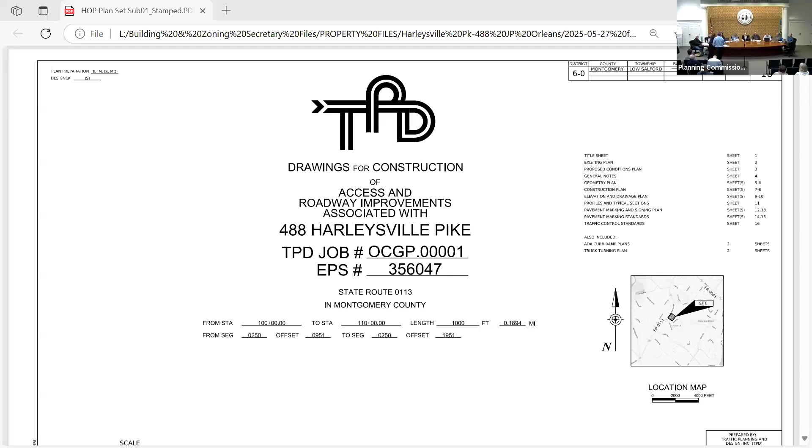So what you're seeing on the screen is the highway occupancy permit plans that were submitted to PennDOT about 3 weeks ago, with the review letters due at the end of next week. Showing the site plan there with the roadway improvements. I know it's a little hard to see them there, but primarily what you're seeing is the access directly opposite Meeting House Road on Harleysville Pike. An emergency access immediately to the north, at the northern end of the property limits.

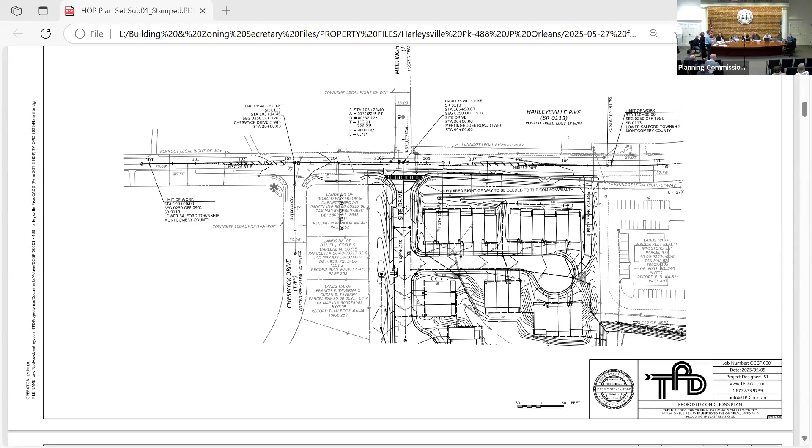And within the roadway cartway, we're improving the roadway by installing a center left turn lane between Cheswick Drive and Meeting House Road, as well as a dedicated left turn lane for the site access. But the additional improvements are ADA ramps and crosswalk at the new site drive, as well as a 6-foot wide shoulder along the site frontage. This has all been coordinated, as Kristen said, with PennDOT by means of conceptual plan submissions and collaboration on that.

PennDOT had indicated that they are accepting all those improvements that I just listed for you in order for us to move forward with that HOP application. And like I said, this plan is under review right now, and we expect that review to come next week. So we don't have that yet. Correct, they're due Friday. But we do have a response from PennDOT's consultant saying the department has reviewed the proposed concept and core boring findings provided and concurs with the proposed use of the existing cartway.

The department has also coordinated with the township regarding the potential signal along Route 113. And this signal is still in pre-planning phases, therefore it should not be included in any plan improvements for this application. Then it goes on about milling, paving, and overlaying. They want us to get rid of the existing striping and any bumps in the road or borings, as you would say. PennDOT also did say that our traffic study does not warrant the center turn lanes.

They said the existing traffic doesn't warrant them, and what we are adding with our 26 townhouses does not warrant these center turn lanes. But there was some pressure put on the department, and they are requiring us to do them. So we are doing what we can to deal with this existing situation and make lives better for the residents of Lower Salford. But it's extensive. The striping goes well beyond our property frontage. We have to move a very expensive utility pole. And maybe another having to do with that sidewalk extension along to Cheswick. We don't know. We don't have the review back for that, but my client's willing to do it. We do have some other issues to discuss, but wanted to start with this.

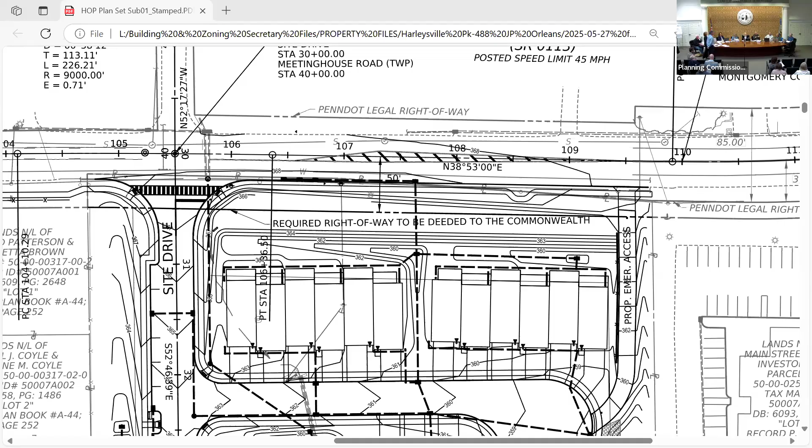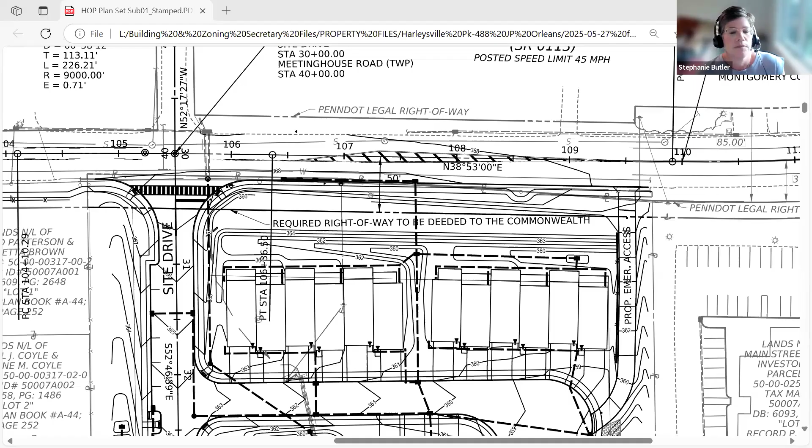May I ask a question about the curb returns? The curb returns, I believe, are set at 6-foot shoulders. Is the pole impacted if those were set back to 8 feet? Just at the access? I'm looking at the pole, it's right there on the edge. So that one's being moved already. There's a pole immediately to the north, screen right. That is already being moved with the 6-foot. There's an additional pole further north that would be likely impacted. Okay, so that's the pole in question if you were to shift another 2 feet. Correct.

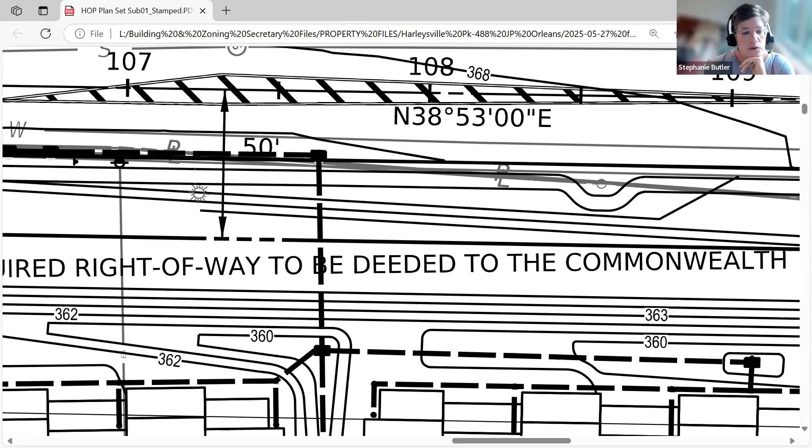So can the returns at least be set back to the 8-foot width? Because that would make them more consistent with the curb line that's at Cheswick, and it doesn't jut in the curb line for the northbound traffic. It's a question, I just wanted to ask it at this point, and I wanted to clarify if the pole was in the vicinity of the return. Are you talking about the returns for the driveway radii? Yes.

If you look from Cheswick to the site drive, you can see Cheswick's curb line is set back, and then it starts to taper in a few feet, so the curb lines are a little bit closer. It's not a solid curb line there by any means - it's a variable width shoulder that is proposed. Could your curb line be set back to 8 feet at that spot? I don't see any concern with that - that's a standard.

So basically, the way the driveway comes up with the throat of the driveway, there's radial curb lines that come out to meet the roadway. They're set back at those points 6 feet off of the travel lane, so obviously they would have to come in if you're going to widen along the front. She would ask that they just be moved 2 feet down on either side, with a small taper going back into 6 feet. So it'd be 8 feet at that point to allow for a future improvement and not have to rip up the driveway and start over. That's PennDOT, typically that's a minor sounding issue.

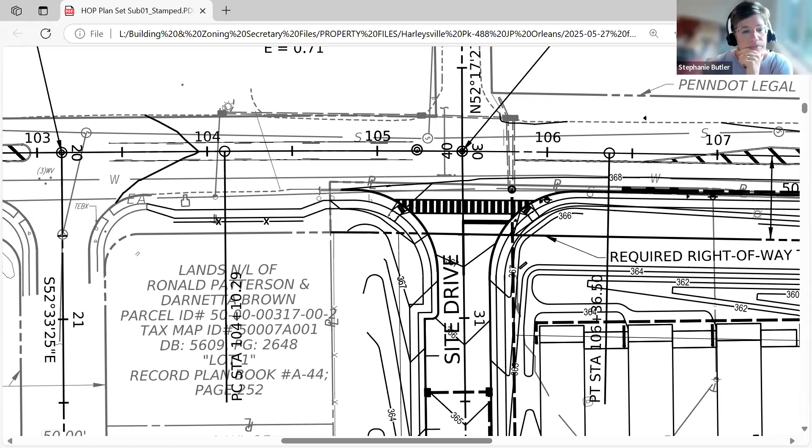I have one question for clarity. Traveling south on 113, there's going to be a left turn lane into the neighborhood. Traveling north on 113, there'll be a left turn lane on the meeting house. Correct, and you're not touching the Cheswick intersection or anything. There'll actually be a shared left center turn lane for Cheswick as well, southbound. 113 will be left turning into Cheswick. So that whole section's being expanded basically to 3 lanes.

I'm sorry if I'm breaking protocol - I don't know what the protocol is relative to asking questions and stuff. But after this, should I make a list of all my questions? Okay, thank you.

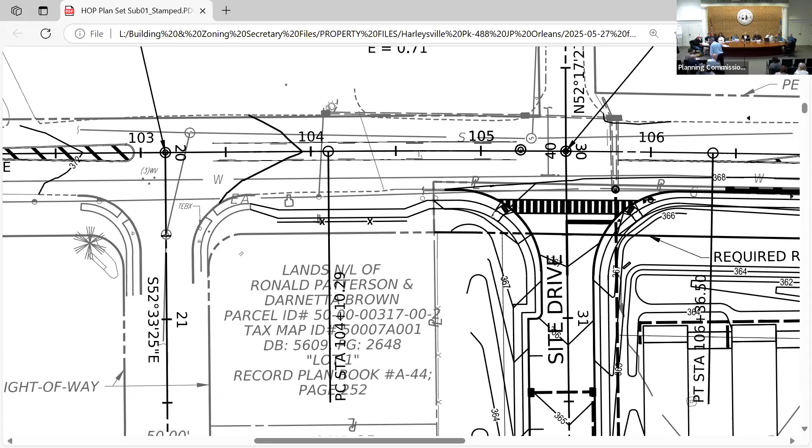The 3 waivers on the first page are the same as our last discussion. The first has to do with preliminary and final at the same time. The second has to do with intersection spacing - that's the distance of our proposed road to Cheswick. The third has to do with the clear sight triangle. I understand there's a code change to make that change, but we're okay with the 75-foot triangle there.

Turning to the second page, items 4, 5, and 6 are all the same - we'll stop at 7. The grading slopes have to do with the stormwater basin, that's to maximize the capacity of the basin. The second one has to do with the shared path location. We have a 25-foot easement, and we've located the path so that it respects the boundary of our neighbors and stays out of those significant environmental features, so it's located along the edge.

Replacement trees - this has been amended. We have a greater number of replacement trees than you saw the last time we were here. So the waiver request is that we plant 80 trees out of that 666. We do have 196 other trees, but they're in the category of street trees, stormwater management plantings, buffer trees, and site element screening. They don't count towards the replacement trees, so there's a waiver request for that.

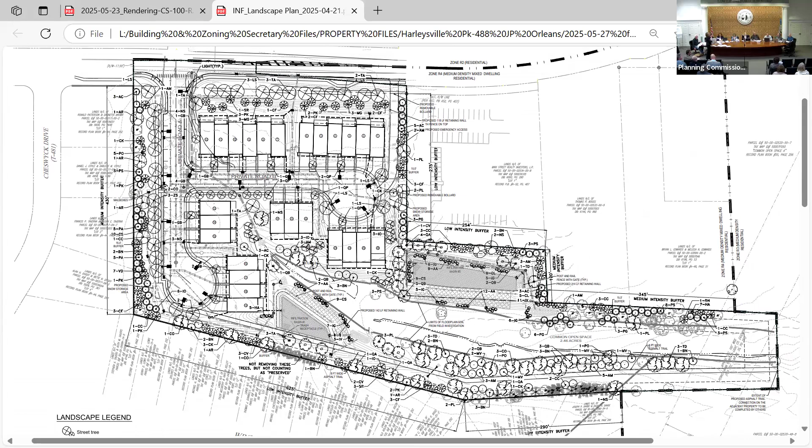You want me to be specific? No, I'm okay, I just want to find it before, thank you.

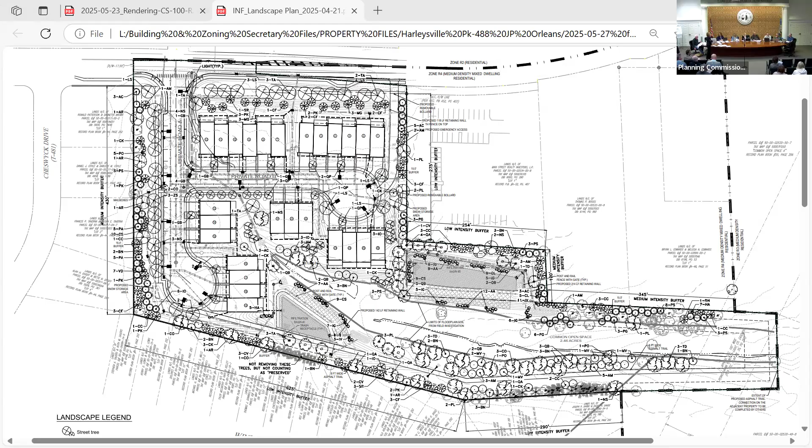And of course, I know there's going to be a lot of questions about this too, especially since you mentioned ripping out the pine trees along 113. I want to make sure other folks saw that the color one actually shows you might do a little better with the buffering along 113 that's going to be restored after you rip out the other pines.

Right, and then I think if we go to the left, there's a berm near the backyards of the Cheswyck neighborhood. You can see there that the planted trees, that is a berm, correct? A raised berm. I don't think they have the berms in. Is that... okay, just want to make sure that's clear for everybody.

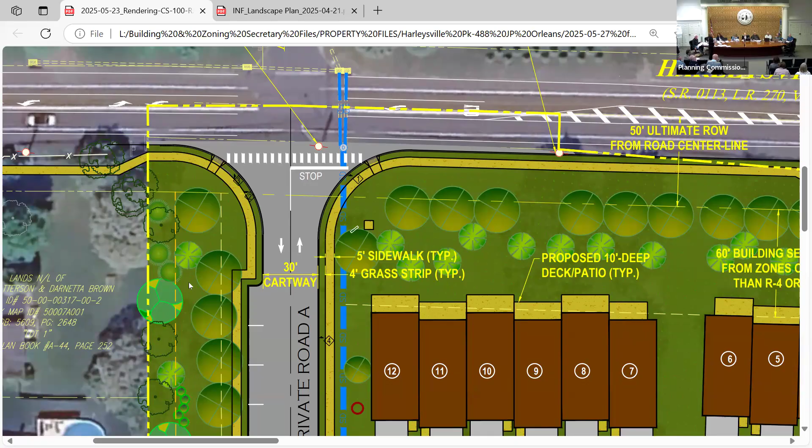And that's a mix of evergreens, which is... yes, that should carry along both property lines. Okay, yeah, there was conversation about the fence.

There's a hodgepodge, we walked it. I didn't walk it, my clients walked it. It's different as you go, some is split rail, some is like box with mesh, some is down, some is up.

We tried to discover it through plans, old plans, how that fence came to be. We can't nail who owns the fence. It is right on the property line, so we don't have intentions to touch the fence. We're just going to landscape all the way in that area.

Remember one of our earlier designs had the backs of these units facing the neighboring properties, and that was a no-go. So we've turned the houses so that none of the backyards on this plan face any of the adjacent neighbors. Instead, they get the landscape.

Stephanie, do you have something else?

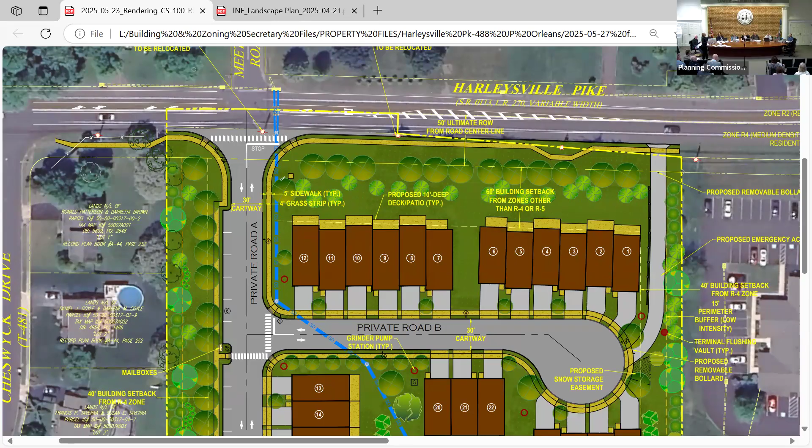Yes, I did. I just wanted to suggest, Mike, possibly bring up the HOP plan that shows the pavement markings. It will be a little cleaner, a little easier for people to see what's being proposed. The previous plan was the land development plan, so it was missing some of the line striping.

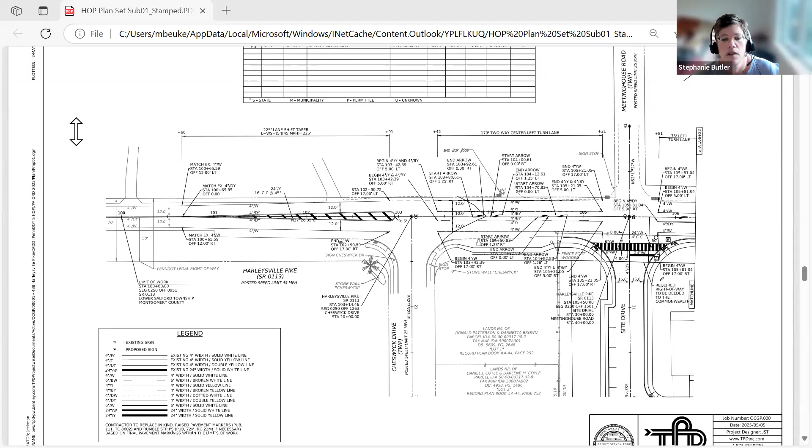So Mike, if you maybe zoom in at the intersection, going from left to right from this sheet to the next sheet, you can see where they have their center left turn lane, you have the 4-inch white edge line on both the site side and the far side. The existing dash line is the existing edge of pavement today.

In both cases, moving to the right, you'll see the left turn lane, the designated left turn lane that goes into the proposed site drive. Their proposed curb returns and shoulders, and then the 4-inch white line on the opposite side approaching the Meetinghouse intersection.

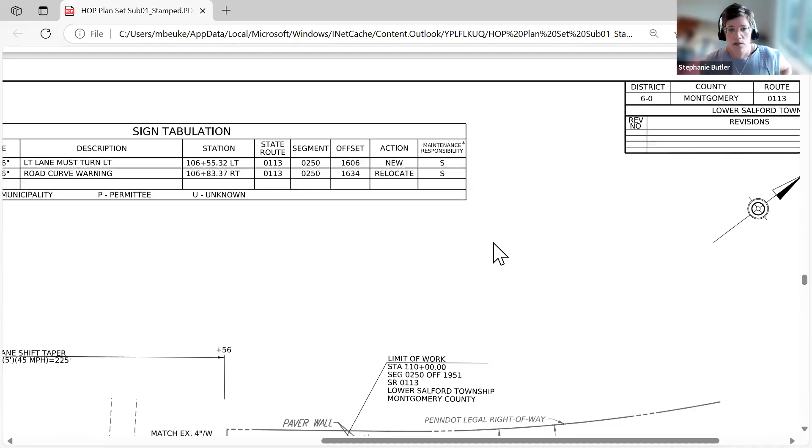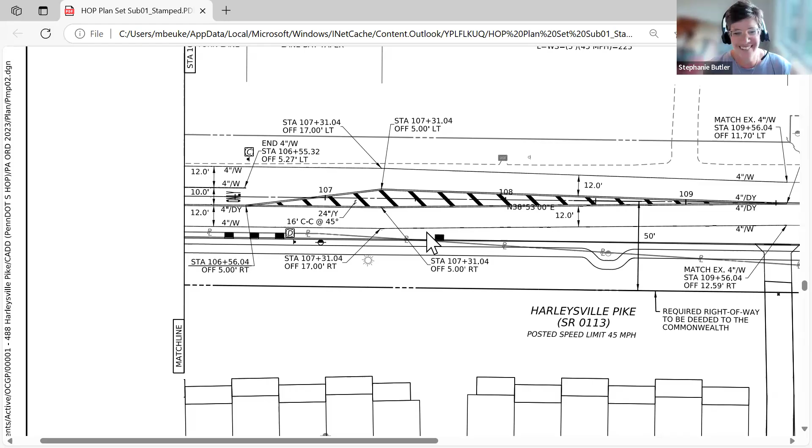So this was the subsequent HOP set that came to the township for review, and we reviewed it in conjunction with the land development plans. Our letter addresses comments for both of the plan sets, and this is the plan that's currently into PennDOT for review. I just felt like it was a little cleaner version of what the proposed roadway condition would look like out there along this section of 113.

All right, thanks, Stephanie.

Anyone else need these? Bring those people to comment, if that's all right. Okay, we're going to open up the floor for public comment. Please direct the comments to the board and not to the consultants. Also please state your name and your address, and please speak.

Who wants to go first? Alan Duddy, 483 Cheswyck Drive. A couple of things real quick.

The situation with the fence that just came up, I thought that was already resolved in previous meetings, that we were in fact going to have fencing replaced. The fencing did belong to the Durstein property because he had horses on the property, so it was with that particular property. I think we still need to revisit fencing, especially given that some of the fencing is falling down, it hasn't been maintained since the new owners have been in there. We've been maintaining it, the property owners.

So that was one thing. I don't know where to begin with this 113 left turn lanes. It just looks like a cluster, it's the only way I can describe it. You're having cars heading north, cars heading south, both going into left turn lanes, some trying to get into the new drive, some trying to get into Cheswyck, some trying to turn on Meetinghouse.

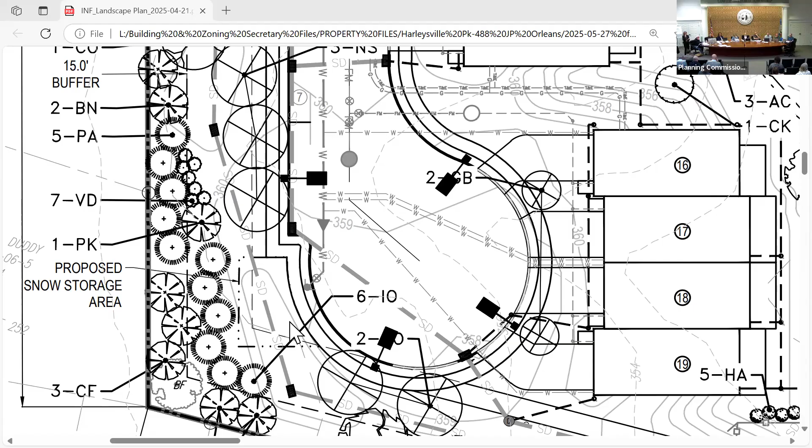So maybe to tag on to what he just said, Robert Menges, 509 Oakland Avenue, so down Meeting House Road. Similar concerns relative to the turning lanes and the amount of total frontage that's gonna be there. Like you said, it's a mess now. As a cyclist, often heading towards Meeting House coming from Cheswyck, from our wonderful bike path that we have here in the township, I'm taking my life in my own hands.

And if you're now adding turning lanes into that, and you're gonna have trucks that are gonna need to navigate, and I wasn't sure if I understood that we're adding 6 feet of bike lane on the side, or reducing it, but I think you really need to take a hard look at that entire intersection coming from Cheswyck all the way down, hundreds of feet past Meeting House, to make sure that you've got enough thoroughfare and an emergency side road, if you will, so people who need to get off on their shoulder can.

We want this to be friendly for the township and the existing community. We welcome more people coming in the community, but we need to make it safe at the same time. And from what I'm just seeing, and I'm not an engineer, it sounds like it's going to be a congested cluster of an issue. So I just ask, and I'll trust our board that you've got the right people on this, but it doesn't sound sufficient to me.

If I then go on to some other things, down all of Meeting House, and this may be more of an issue for our board members. You're probably aware that many of us have lost our well water supply over the years. I understand that shifts in the limestone, et cetera, can cause that. My concern is that when this development goes in, what does it do to the surrounding area bedrock, and possibly shifting of the water supply that goes through all of the people down Meeting House, down Oakland and Woodland Avenue, right? And I know that your company can't be held liable for that, but have sufficient studies been done to really ensure that 6 months from now, 6 years from now, I don't lose my water?

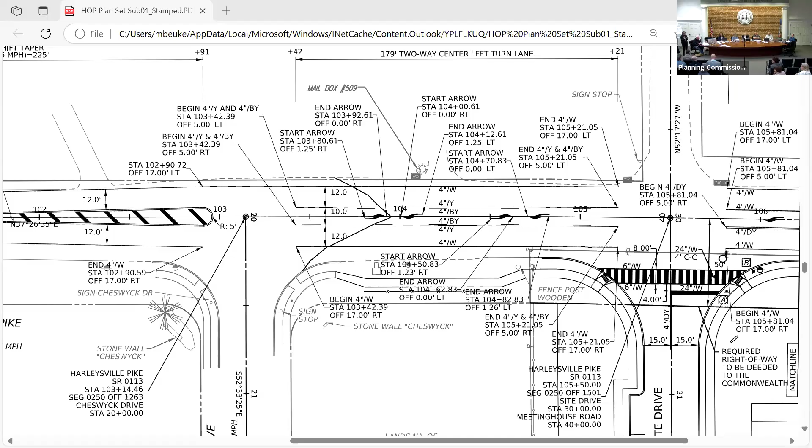Sure. My name is Joe Lee, 471 Wexford Circle. I have a question about the landscaping on what would be the southern edge of the property down below. There are 2 stands of very large, fully developed pine trees, and they're indicated as BF. What does BF mean? Buffer planting. Does that mean that stays or does that go? Stays. Second question is that fence line

across that back is all horse pasture, and it wasn't ours. And it's in desperate need of repair. Is this going to be referenced to the board? Beg pardon? Oh, I'm sorry. Are they gonna repair that fence line, because there are sections of it that are missing? I don't mind the animals coming through, but if you're putting a walking path in there, I have objections to other people using my backyard to cut through, to cut off a half a mile. So I'm just wondering if they're gonna do that.

And I have all the same objections to what they're doing. I won't go that way anymore, I just go out the back way. I wouldn't even think of using 113. Thank you.

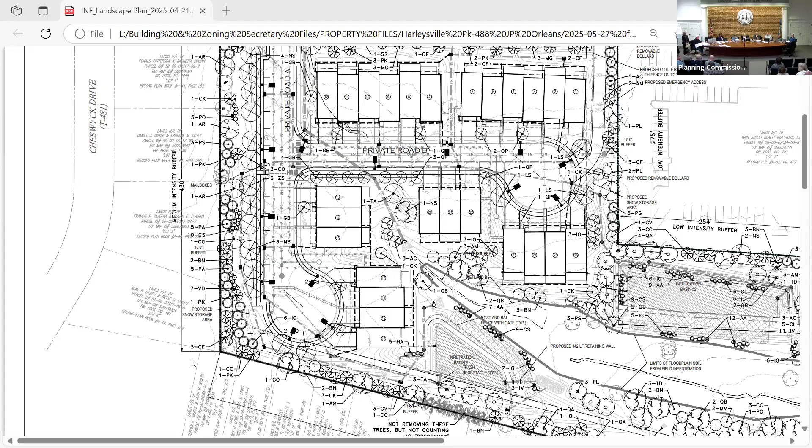And lastly, one last question. It appears, I think, that the 8-foot walking trail has been moved further back. Am I correct in that assumption? The walking trail that goes, yeah, right there, Mike, where you're pointing. That appears to be further back from the last drawing that we saw in September.

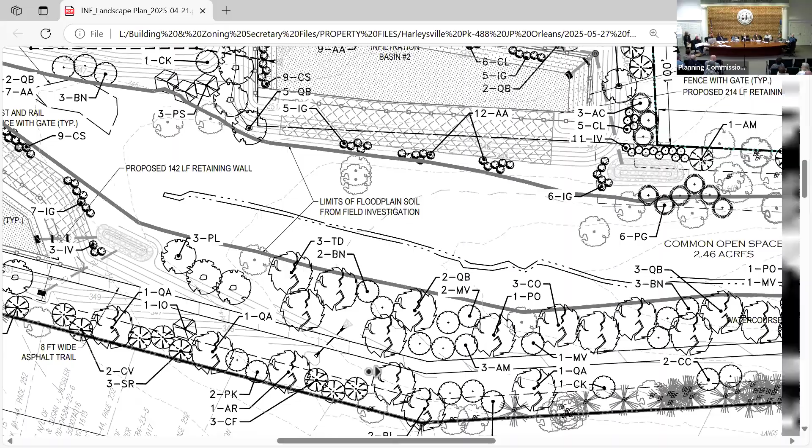Julie, can I... Betty, can you please make the final comments? I sure can. Because we need to discuss some of these items. I'd love to. Appreciate it. Thank you. What's your last name?

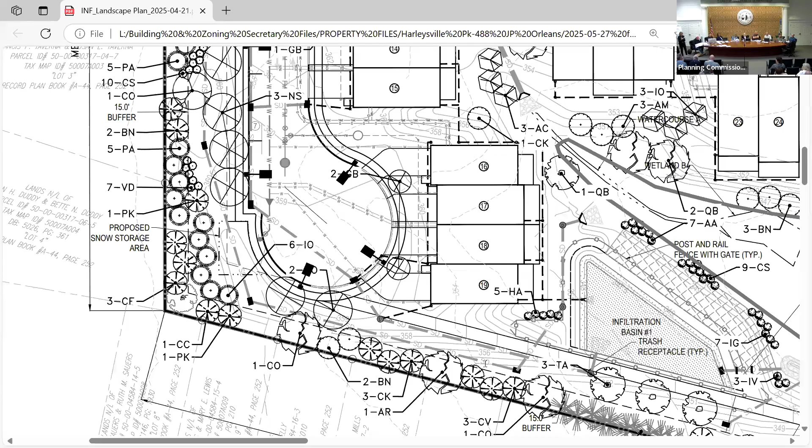Betty, 483 Cheswyck. It seems like we're doing a lot of reconfiguring and a lot of rearranging everyone's lives, the community with the road, safety, privacy, security, everything is being jeopardized for one development. And I've never seen any other development in this township go through so much to be able to get a development put in.

And I'm not putting any negativity on you. I'm just saying what we had to call for PennDOT, what we had to ask for from the community, what we had to ask for from the planning commission. How many revisions you guys had made is crazy. And I appreciate you accommodating us. Don't get me wrong. However, it's a lot just for one development.

The trees are way out of numbers. You have 666 and you're gonna go down to 80, or even 176 was too low. It's only because you don't have space because you're putting 26 units in, which everyone told you, including the planning commission, that's too many units.

I understand you moved them around, everything is great. However, you still have them plopped right in the middle of the wetland, right in the middle of everybody's line of sight in the community and the neighborhood that's been there for over 50 years. You don't need them, but I know that's not gonna change, but we need more trees.

My berms on my backyard, I am not looking at a 35-foot triplex or biplex, I'll tell you that right now. If you're moving the berms out, which I wasn't aware of until recently, I want at least 14-foot shade trees all along my back fence line. And I want a 6-foot privacy fence, because that's what I was promised.

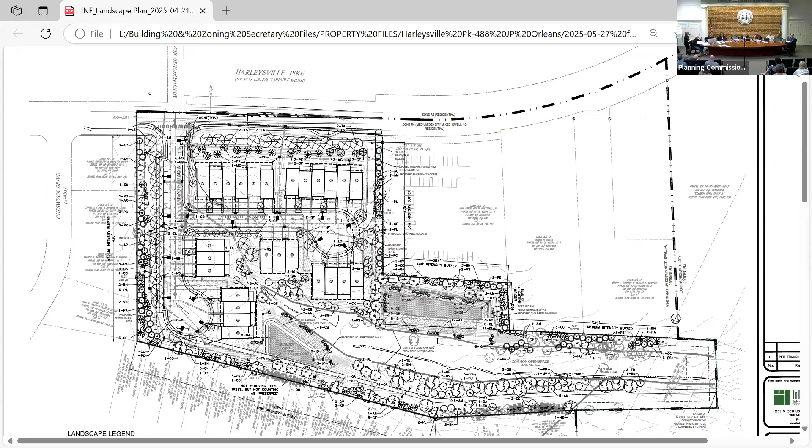And, continuing with that topic, Kristen, perhaps you could let us know, there is some concept of blasting. Yeah, we don't think that there's going to be any blasting. We didn't do the blasting survey yet, but based on the geotech that we performed on the property, we don't think it's necessary. Yeah, we have basements running, yeah.

Okay, I want to separate out the traffic and intersection issues, so the other issues we talked about get first. And we started talking about transport. Wait, I just wanted to ask you your thoughts, any further thoughts? My recollection was that was an open item, and I thought we're leaning towards in previous meetings that you're gonna take on the fence. I don't think that was ever 100% decided, but my recollection is we're sort of going that way because the residents are kind of between a rock and a hard place, they want everything. And the fence does need repair.

Here's the issue, and we didn't resolve it, and we had a staff meeting since our last preliminary time here in September, trying to figure out where the fence came from. Because it's right on the property line, it's hard to decipher who owns the fence, and it changes. So there's no great indicia. I know people who live there have an opinion, but there's a legal issue with replacing the fence that's right on the property line. I don't know who owns it. We would need easements from every property owner to do it. We're gonna have different opinions about the fence for different properties. Many people use it as their third side for their own fence in their property. How to manage all that seems untenable.

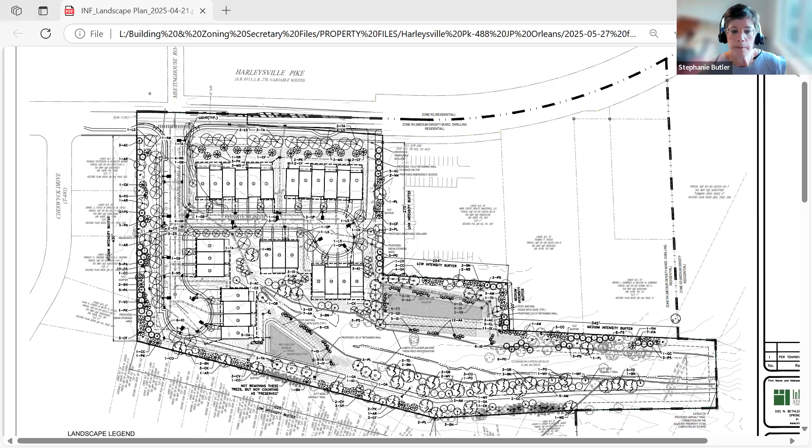There is a line of sight for the clear sight triangle, 75 feet back, 300 feet in each direction, left and right. And there is an existing tree or 2 that are within that sight triangle. It is on the adjacent property. Mr. Patterson and Miss Brown. Mike, if you wanted to bring up the land development plans, sheet 4. Looking to the left, you can see those existing trees and the dashed sight triangle line. So those trees are within that sight triangle. They are existing and they are on the adjacent property.

Likewise, there's a few other trees that are between the road and the sidewalk. I will point out the Cheswyck sign is to the left and back, so that is well out of the way of the sight triangle. I will also add that the required egress sight distance to the left and to the right is measured in a different way from a clear sight triangle, and we do not have any concerns with that. It says required sight distance, 45 miles an hour equals 383 feet. Available is 1,000 feet, and it's the dashed line. So that's measured much closer to the road, and there's no concern with that line of sight. But there is some existing vegetation within the clear sight triangle.

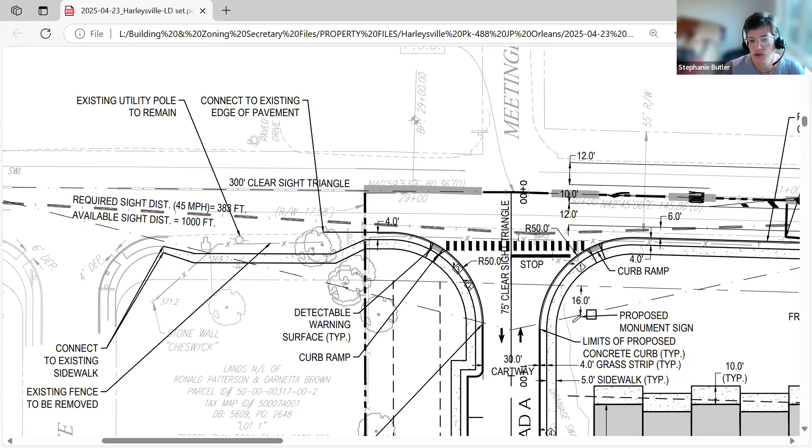And what does that mean to the fate of those trees? Well, we're trying to figure out what kind of tree it is to see if the canopy is up high enough. That would be the next question. Does it look like it impacts the clear sight triangle? I can't answer that question at this time. If it does impact the sight triangle, then what? The survey doesn't show the type of tree, so I'm not sure. And maybe our waiver gets adjusted to be a 74-foot instead of 75.

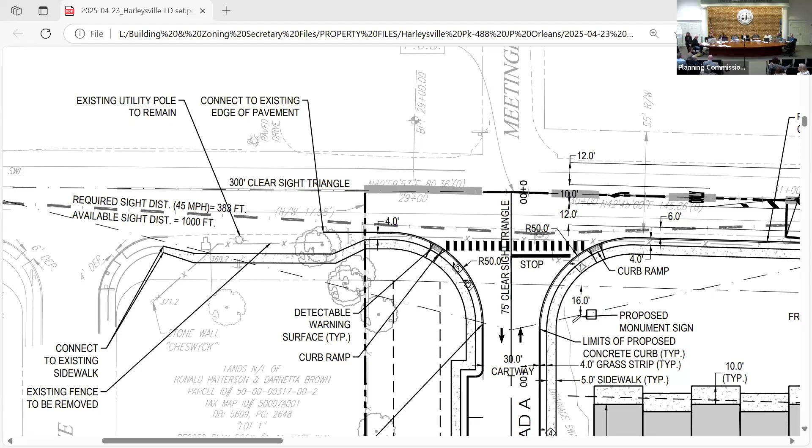The trees along the frontage there, they're all within the PennDOT right of way. I don't think we planned on removing them. I think that we have to look and see if that canopy is high enough that you can see. Okay. Kristen, the PennDOT sight distance is met without that impact to trees. PennDOT sight distance, is that 75 feet? 10 foot back from the edge of travel lane, different distances in each direction. So the township code though is 300 foot and we were asking for 75, but thankfully someone brought that up and maybe we need to adjust that to maybe 73 or 74. I'm not sure what kind of trees they are.

Stephanie, could you talk a little bit about the concerns neighbors have regarding the turns into the communities off the main road and on Meeting House? Can you talk briefly about how that will work and what the process is for determining this?

Sure. So the traffic study was completed, and I know there was a comment about the traffic volumes and counts being from 2022. There are standard guidance and rules followed for a traffic study, reviewed by both the township and PennDOT. Traffic counts within 3 years are generally accepted. There's also accommodation made for background growth traffic and other developments in the area. All of that is scoped within the traffic study to determine existing and future conditions, both with and without the development.

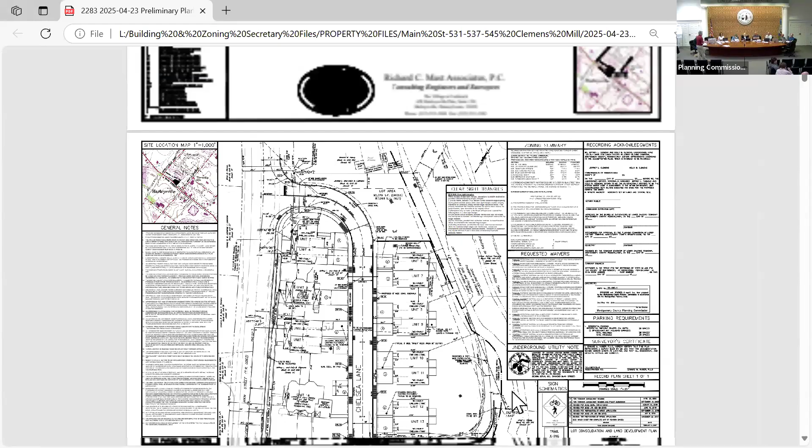Evening everybody, and that is correct. This property unfortunately has been the subject of many fits and starts over the past 15 years probably, and for reasons unrelated to the project itself, it's not moved expeditiously. There's another developer who has the property under agreement, so that's going to provide, I hope, some momentum to finish it at this point. Not sure how many planning commission members - I know a few of you have seen the project before. I think Manus might have been here for the whole length of it, and I know Michelle and Stephanie have been around for the last several renditions. Also somewhat of a challenging site.

The primary challenge has always been the access point. It has had a few iterations before we ended up with the configuration you see. But probably the most challenging aspect, if you're familiar with that part of Sunnytown Pike, is it's a very steep embankment today, right where our road is proposed.

That steep embankment, rather than continuing along Sunnytown Pike, will continue along our proposed access driveway until it basically runs out of grade. At one point, we had a PennDOT permit for that access. It's since expired, so we do need to reapply and reacquire a PennDOT permit for that access. It's a state road, obviously. I did have a conference with PennDOT and reviewed the issues. I don't believe there will be any issues with acquiring that permit in its present configuration. So we're really dealing more with whatever township issues surround that access. Primarily, it's been the grade, I think.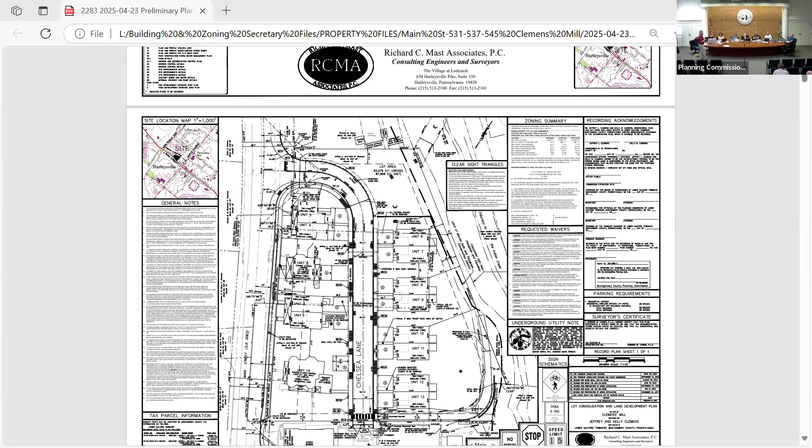We are proposing, at the bottom of the plan as you're looking at it, to connect to the adjacent driveway, which is a small office building and apartments. I think there's apartments on the second floor, office on the first floor. So it does provide a secondary access point for that project as well. That's also private, so we'll require an easement agreement between the two property owners. And I believe their access is somewhat compromised in terms of sight distance, so I think we're providing a better solution for their site as well.

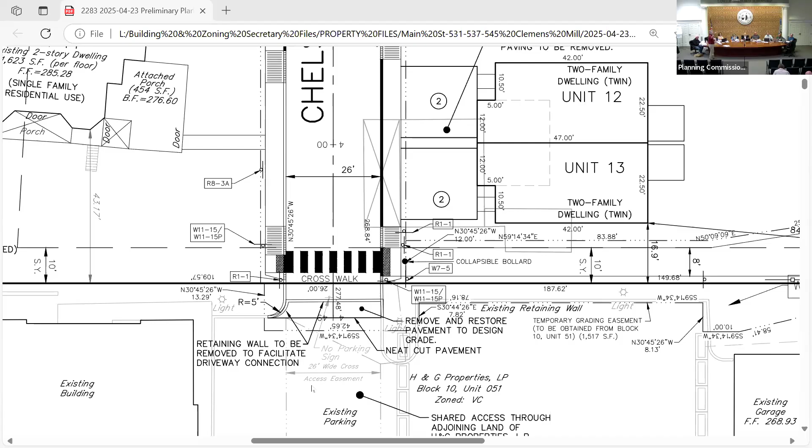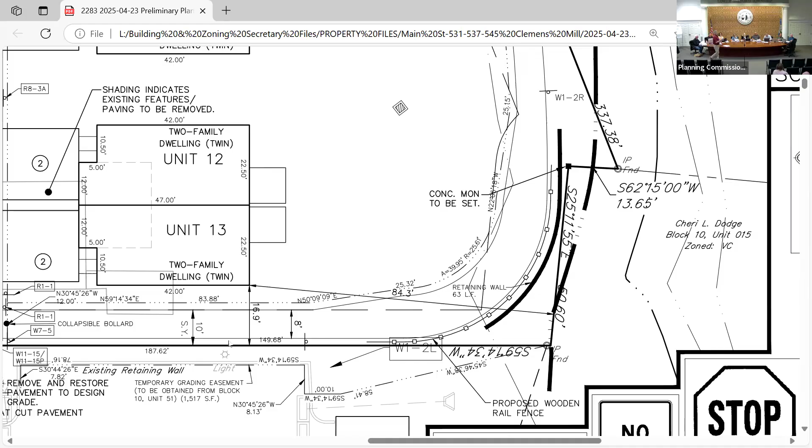Another important aspect for the property is I think an important pedestrian link. We are proposing to extend from Pioneer Circle through the township open space, ultimately through our property. You can see the path right above where Mike's arrow is right there. It'll connect to our access way, go out to Sumneytown Pike through sidewalk, and then Sumneytown Pike will have sidewalk as well. So we're proposing curbing, widening, and sidewalk on Sumneytown, but not there.

It actually will follow what's labeled Chelsea Lane. If you continue where you were, Mike. Just back over the creek, right? Well, yes, that's where it connects to Pioneer Circle. And then it goes along our roadway up to Sumneytown Pike, and then continues along our frontage along Sumneytown Pike.

The reason I think that's important is it connects the Pioneer Circle area to Harleysville, including the new pathway that was constructed along 63. It's not really feasible for that path to continue beyond this property along Main Street, just because of grade and things like that. So I don't see the sidewalk continuing, so I think it makes that connection even more important in terms of bringing pedestrian traffic to Harleysville.

I will... the proposed. What length of the road? It starts about the beginning of, well, the length of road that's 8% is 9 feet. That's it. It's a 9-foot section that's at 8%. It goes to 2% at Sumneytown Pike and 5% on the other side. So it's really just one short section that's 8%.

The good example I can think of is in Vernfield. There is a development that's similar. It's Covenant Lane. I believe Covenant Lane is a 10% grade coming down there. So it's not as steep as that, and it's only for 9 feet. If you don't have any specific questions, I'm going to quickly go through the review.

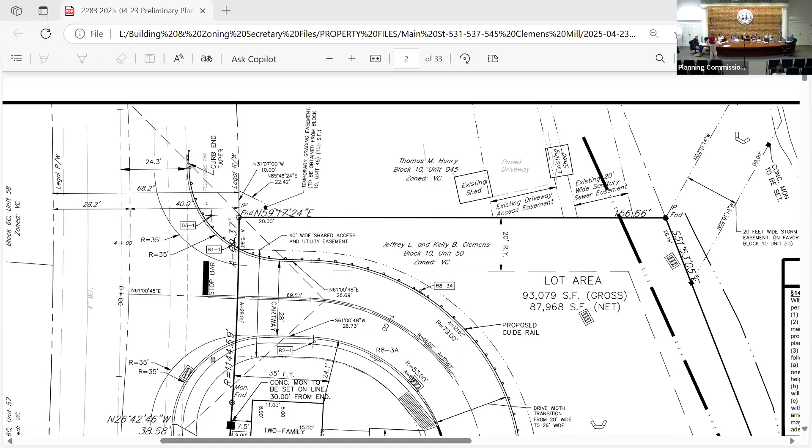They are 2-family dwellings. They're twins. Sorry, I should have covered that. There's 6 proposed buildings, 2 units each. So it's 12 new residential dwellings, 6 buildings. And there are 2 existing dwellings, which will remain single-family dwellings. And they're both brick. One of them is sort of Victorian looking, that one there. Yeah, needs a little work, but it's got great bones. It does. It could be really nice.

Rick, are there any major changes from when it came before? No, the changes are minor, just trying to address review comments. The only thing I'm really looking for tonight is some kind of consensus that the configuration is resolved at this point. Well, how come this always gets going with gangbusters and then just kind of stops? It needed another developer to push it along. That's the simple answer. The landowner doesn't even live in Pennsylvania anymore, so it just could not keep momentum. Recommend approval at some point? No, it got very close, and then again, momentum stopped, and then our permits lapsed, so we kind of got back at that point.

What we need to do for the offsite path is it does go through two owners' properties at Pioneer Circle, but there are existing easements there. We need to meet with them and resolve it. Might ask for the township to help us with doing that because the easements are really for township purposes. But I don't want to approach that until we at least know we're headed in the right direction.

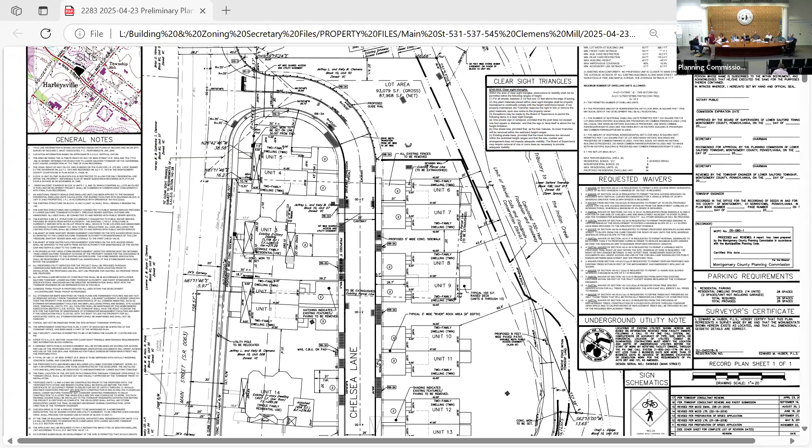So the current version of the village commercial ordinance says you're not allowed to remove a tree within the front yard unless it's required for proposed driveways or the tree is unhealthy. In this case, I don't believe that tree is in the front yard because it's on the right of way. The front yard is the area between the street line and the building setback or the building. In this case, we're right on the right of way. So I don't think it's right to have to get a zoning variance to put in required township improvements. But looking at the new village commercial ordinance, that zoning provision has been removed. I know that ordinance isn't in place.

Could you confirm that this is the tree? That's it. It looks like a tree. It is big, yeah. It's still alive. I drove by it tonight, just hoping it died. But it didn't. Got some dead branches, but it's not a beautiful tree. I just think the determination should be made. You replace it then? Yeah, it would be included in tree replacement calculations.

Are there currently street trees along the section? Not really. They're all kind of weedy junk. Is that it? Yeah, that's it. No, there isn't. Once you put the sidewalk in, there's not a lot. And what you're seeing is the existing right of way, not the ultimate right of way. The ultimate right of way goes right through the middle of the trunk. And I don't think it's a situation where we should move the sidewalk closer to the curb. It's not that nice of a tree and you would compromise the sidewalk, in my opinion. Don't need to convince me. Yeah.

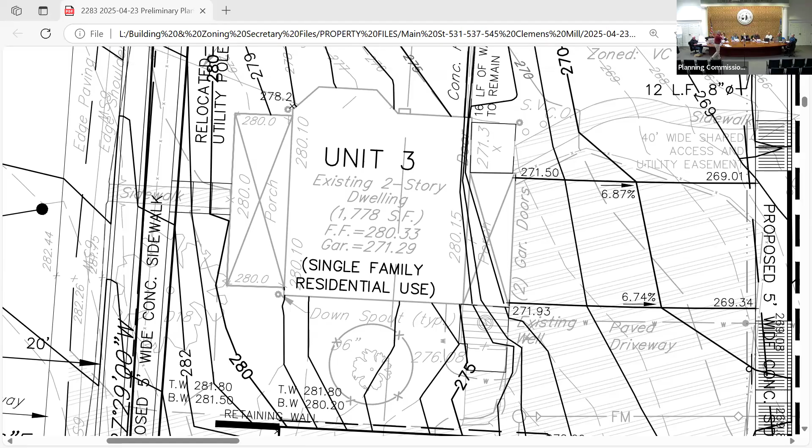Our waivers, a number of them are related to the roadway, as I just described. And the waiver list is really derived as if it was a public road. In other words, if we were proposing a publicly owned road dedicated to the township, this would be the waiver list. I'm not necessarily disagreeing that's what it should be, but I think it has to be looked at in context that it's a private road as well. We have discussed waivers in the past. I would be happy to go through them if you want me to. I don't think it's necessary.

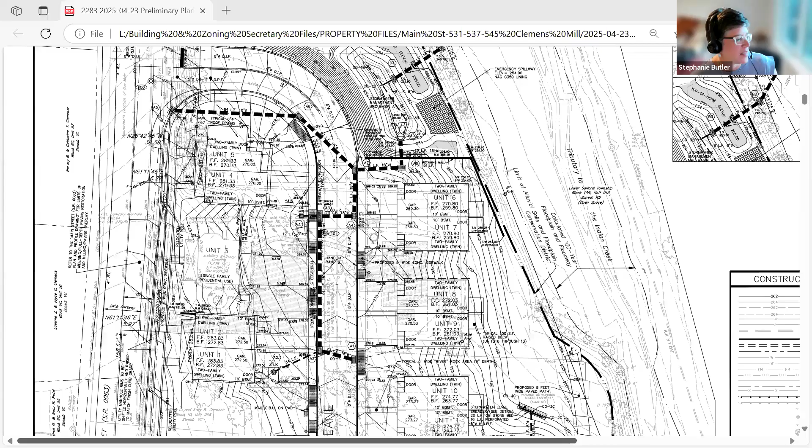Stephanie, could you tell us what your first impression is? I assume you've seen this before? Yes, I have. Rick is well aware of my biggest concern with the horizontal and vertical curvature of the access. Mike, can you go to sheet 16, maybe 17 with the cover sheet. There's a plan view and profile view just to allow the members to see what my concern is. You might have to go to the next. I have it as sheet 17 on the PDF package. There you go. So you can see the access approaching 63 at the top left.

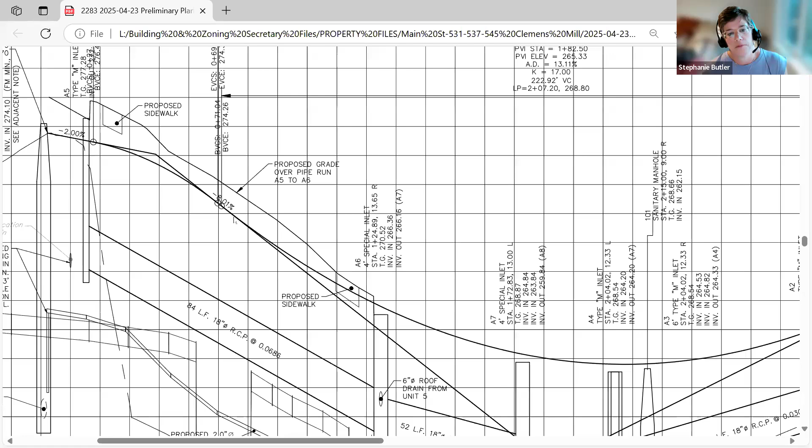And then it goes into the horizontal curve, which is the 66-foot radius curve. The profile down below on the left side is Sumneytown Pike or Main Street. If you zoom in, that's 2%, which is what Rick was saying, coming off the high side of the super elevation. That allows for the 8% maximum grade change. He carries that 2% for a distance, and then it goes into a curve, which is then into the 8.01% grade. If you pan down just a little bit so I can see the stationing, it's roughly 8% for probably, I think it's 9 feet.

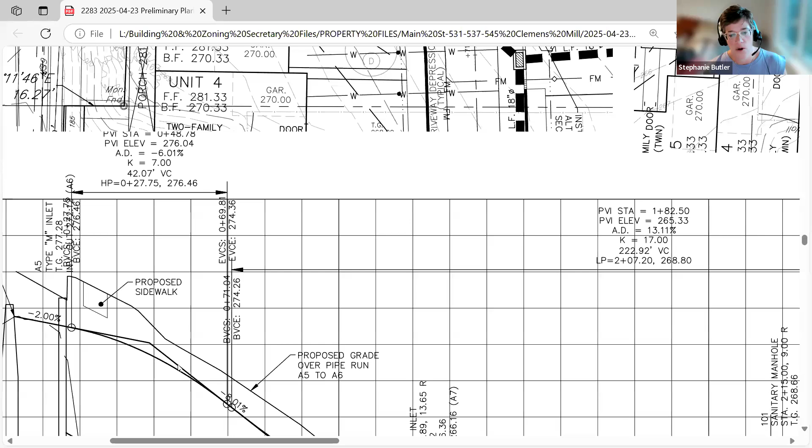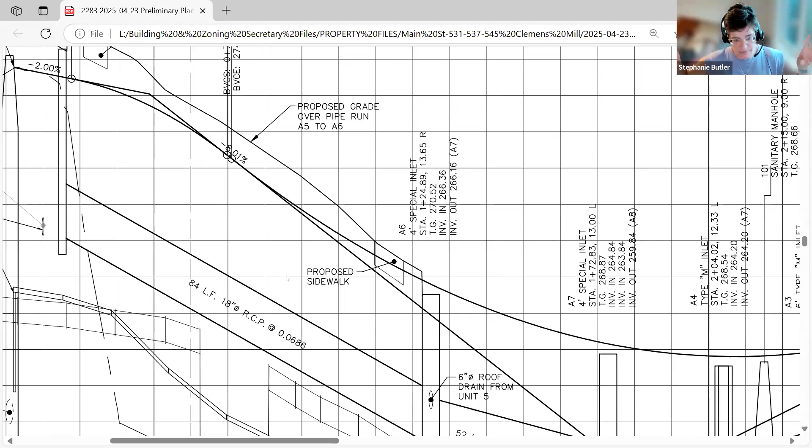Actually, if you go up, you see the labels for the curves. I think it's certainly more than 9 feet, but maybe it's not. Actually 8%, but then the curves themselves have the steeper slope going into the reverse curve, and heading down. If you pan down a little bit, please, Mike. You can see that's essentially 8% over this distance, where the curve is starting to bend in the other direction. So our main concern is that we're using a minimum horizontal radius or below minimum horizontal radius with a maximum steep grade. Generally those two items together should be avoided, because you're using the maximum of each for this condition.

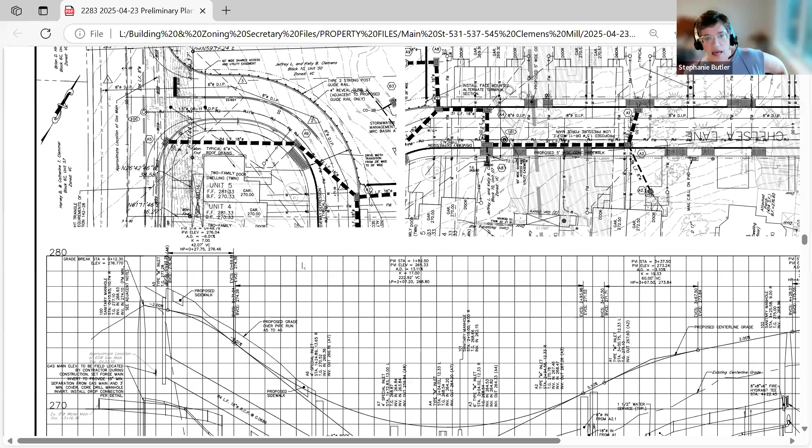Vehicles are going to be entering and coming down the hill and around the curve. So that's our biggest concern with the access. I understand it's tight. I understand it's steep. I understand it's similar to Covenant Lane. Covenant Lane has a longer straight section, even though it's steep, as it goes down the hill, and then there's a T to make the right. Rick and I have talked about this many times. I just don't really think that the maximum slope and the minimum radius make a good combination. That's my opinion. I understand it's going to be a private road, but there are still going to be icy conditions. That's the reason for not wanting those two items coupled together.

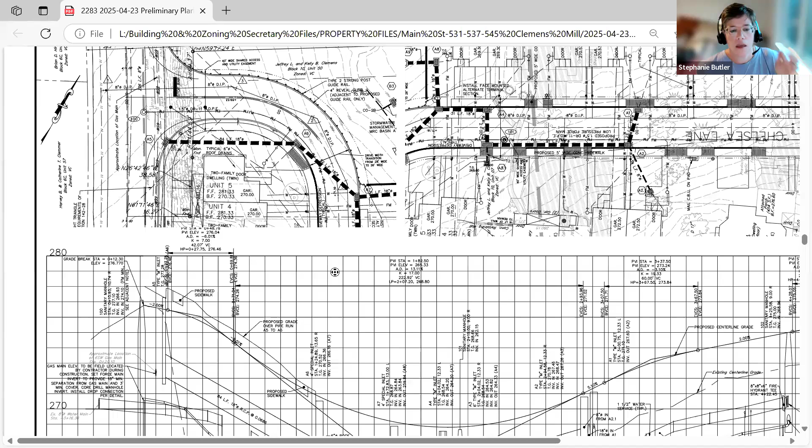Slightly, would be able to pick up enough grade to make these slopes more palatable, like to move the units up, swing the road up. I might need you to repeat the beginning of that, Julia. You were breaking up a little bit. If you were to remove the 2 units that are also in the floodplain in the top corner there, and have the road go further towards where they are, and then swing back up, would you gain enough length of road to make the slopes more palatable?

I really don't think so. I think it's a very difficult area. Within the confines of what he has to work with, you can see the slopes are steep where the bend is in the road. You can see the contours there together.

So I think the place where I would probably disagree with Stephanie is use of the word steep for 8%. 8% is not flat by any means, but I wouldn't necessarily call it steep, and that is at the maximum grade. And then it is considerably less both directions on either side of that. That's kind of always been my contention here.

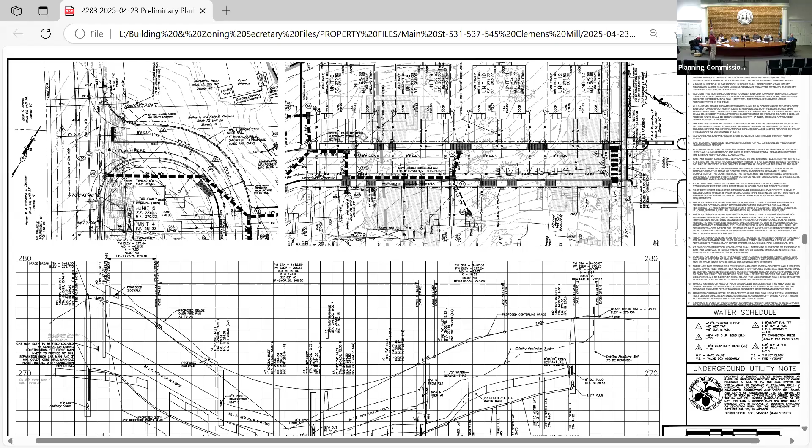The one thing I'd really like you to change is the outlet height, I know. So you'll do that then. You said we'll apply. We'll satisfy it. I have a different idea for you that maybe will satisfy, I think, what your concern is, so.

With the way the water's gonna run off this driveway down into that area, this house is being flooded out. The road's curved the whole way and has storm sewer in it, so no, I don't believe they'll be flooding out. The last storms we've had, the last couple weeks. Most of the areas that flood during those storms are areas that don't have modern stormwater design. There are basements, they're walkout basements, so they'll all have kind of a grade to. Should not have a drainage problem in the basements because they're walkouts.

The buildings, we had previously provided architectural drawings, but that's not the builder, Bob, so they're working. I don't have them tonight. You have to squeeze that many in there, eliminate one or, no, just cram it all in one spot. It just doesn't seem feasible. I don't see if we did that anything would change with regard to the design. So no. How big are they? Like square footage of them? They're approximately 20 by 50, I believe, are the units with basement. And then basement and main floor and upstairs. They're not necessarily small.

You're gonna, I assume, rehab the existing buildings to a certain extent? They will probably be sold separately, not as part of the development. They are both occupied by fairly long-term tenants. I don't know whether they'll ultimately be the purchaser. The property line remains the same, or are you redoing that? No, the property lines are gonna be redone completely. But they will be part of that association then? No. Independent? Okay. Not intended to be that way.

Because you're providing rear access to that, right? We are. Onto your private road, which they own. I shouldn't state that so confidently. Those homeowners documents still need to be created, so not sure how that will work out in the end. So I guess it's feasible that they may be included in the association.

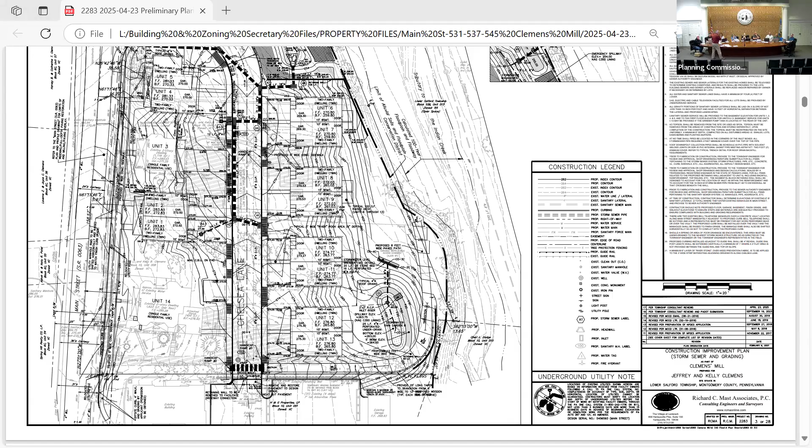The county had some comments, and you probably have not seen this one before, I'm not sure. I have a memory of reviewing it, but I can't remember if it was an unofficial review, if I thought at a commission meeting, I recognized it immediately. But no, I remember I looked at it back in the files and I saw we had some old reviews from 2015 and something like that.

So I think the main comments are this tree variety, and we can look at that, providing some additional variety. I think maybe I had a comment about an invasive species for one of these rows, possibly. But varieties we can accommodate.

And also, because of the steep slopes and the plantings we're proposing on the steep slopes, we are proposing tree wells. Michelle's review is asking for some greater detail, maybe different use of materials. Claire's review is asking to look at that situation, which we will, and that doesn't really affect the access or anything like that. It's just how we would accommodate plantings on the steeper slopes.

It's what? Yes. Yes, none of that. There's really the only township, I would say, public facilities, the portion of the path that's on the township land ultimately, and the sidewalk, but the sidewalk's really the association too, because it's the homeowner that maintains sidewalks. So. I think that's it.